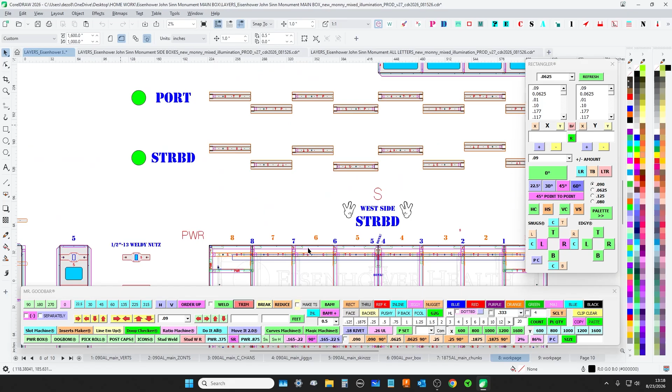John Sinn, Eisenhower. So this was a big boy. I had to break it up into three different CDRs for myself. So when I'm breaking it up into three CDRs, we got ourselves a big job.

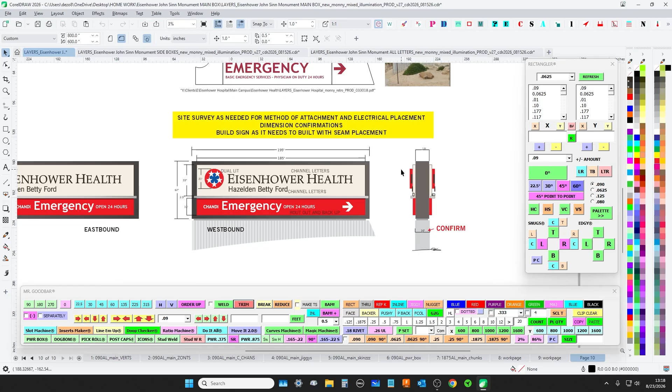I'm not going to go over every little part because you guys have your eye in, because this shares about 80% of the DNA from the Eisenhower Tockwitz 1111, and the Curve Boy right down the street on Country Club, or the Curve Boy on 1111.

This is a little bit of a warning overall, kind of a warno, is that yeah, this guy has literally every kind of thing we do minus push through.

So it has the little silly acrylic letters. It's got regular, reverse, it's got the dual lit with trim cap, plus it has backed up plex and the bar that we always do.

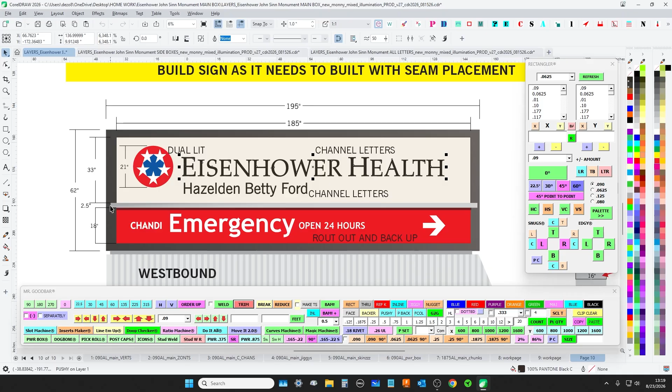So my warning to you, just overall for this, I just want to hit the high notes. Hit the high notes, son. There's a lot of work, but also what's coming behind it.

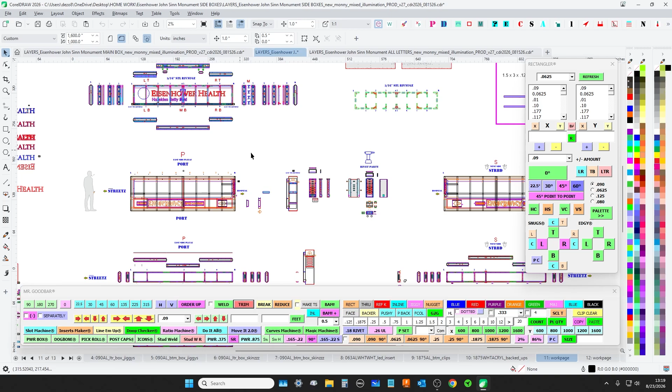You sit in the meetings like me, so we know that everything's going to be the end of September to the 1st of October. And I'm working on the two De Anza monuments, which are also chaos. They're probably the worst little acrylic letters we've done to date, even worse than these little guys, or girls, however they self-identify.

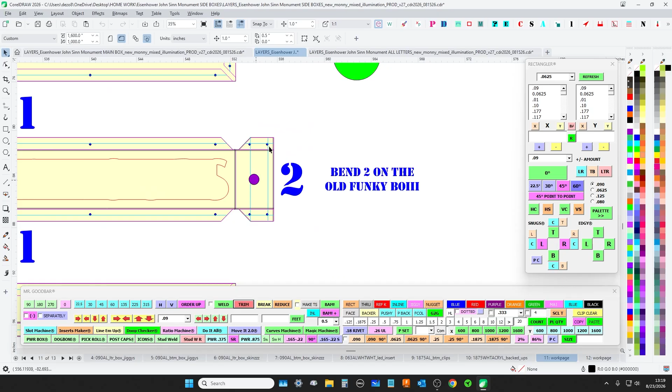My advice to you, and I'm not saying you don't know what's up, but act as if this is due tomorrow. The second you can get these white trays, just for note, you're going to do the main bend and then wake up the little box break and set it up to where you can get in there. And we're going to make the boxes.

You're going to rivet the sides, and then we're going to do the face hugger, like I call it, like we just did with the gas station, because we can't have light leaks. The red box is going to be separate, that way in case it needs to be serviced.

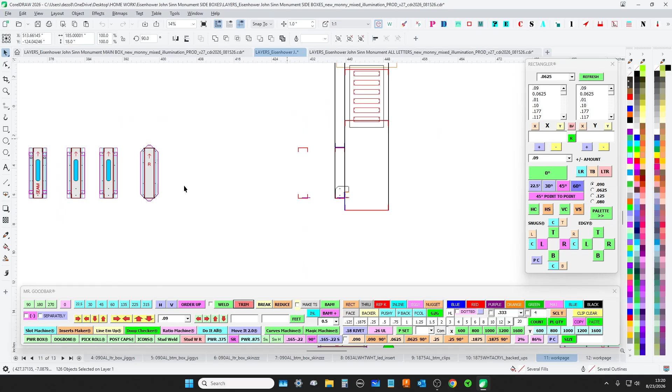Look out for the 1/8 inch right here, just a little bit of space. By the time you drive by, nobody's going to really see it. Plus a little bit of ventilation with an 1/8 inch gap over almost 20 feet should get some airflow.

But anyway, in case we need to take this off, this is serviceable, because I figured once this panel goes on, you're either working from the outside or you're working from the inside at the power panel where all the power supplies are.

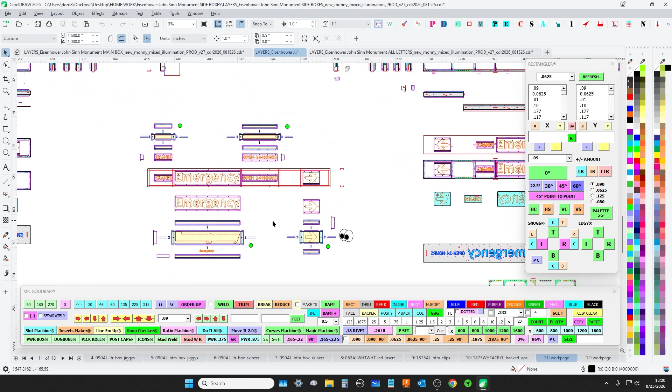Back to what I was saying though, this is going to be a lot of LED work, and this is going to probably come back from paint right in the middle of De Anza. And you got Find Food Bank that I'm sending today. So you're going to have tons of LED work.

So I would first, the second you get these, have somebody dedicated to just LEDing everything, leashing it up. Go ahead and get silicone on everything, act like it's due tomorrow, and then let it sit in the wrap bay and collect dust out there.

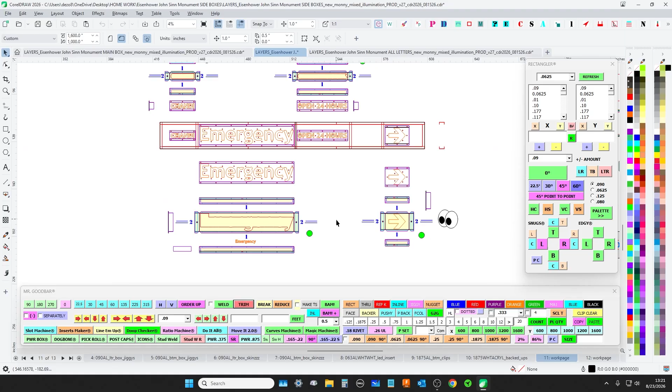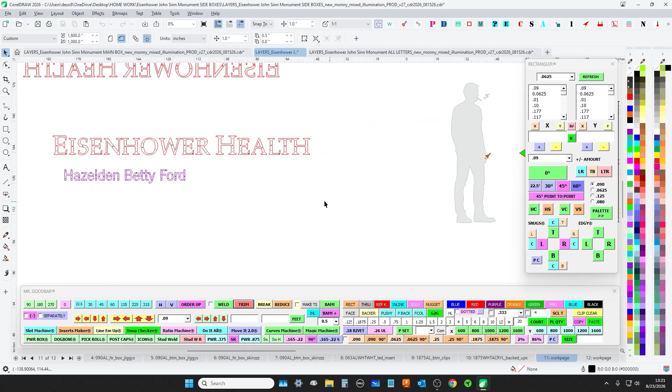Plus these things are big, so you're going to be doing that coffin carry, moving them around, maybe forklift, whatever. So even just the assembly, even forget LEDs, when it comes time to assemble these, it's going to be quite a chore.

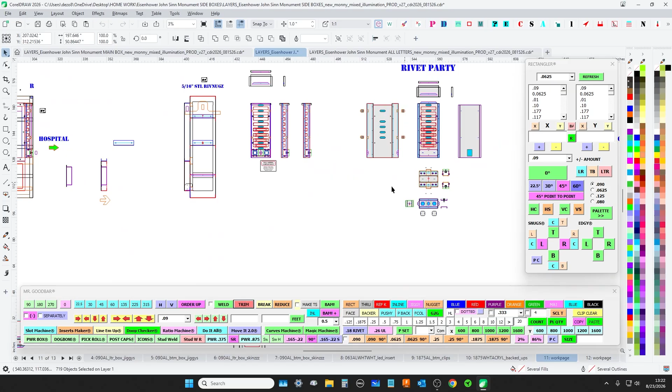So again, this is going to probably drop right back in the middle of De Anza, and they're all going to want it. You know how it is when we have competing salespeople: I want my job, no, I want my job. So just be ready.

Even this thing, I did my best to guesstimate, but I didn't do a full breakdown. So doing the LEDs, the first thing you can get your hands on, the polymerics and whatnot, get the count. Then you can split it up.

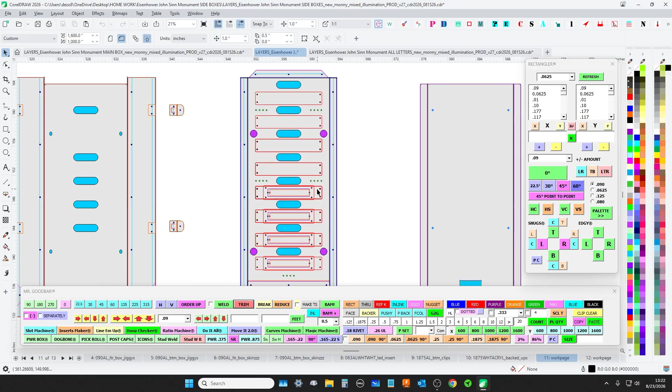What I did is I tried my best to figure these guys would be 24 volt GE. So you'd have like logo on one side, logo letters, maybe the bar, right? And then maybe these two could be the two emergencies, the red cabinets, backed up Plex, possibly. This saves you, I have these set for MPSs right here, but I also have Keystone. So maybe bring in a bunch of Keystones as well, because those are going to be 20 or 12 volt, the little boys.

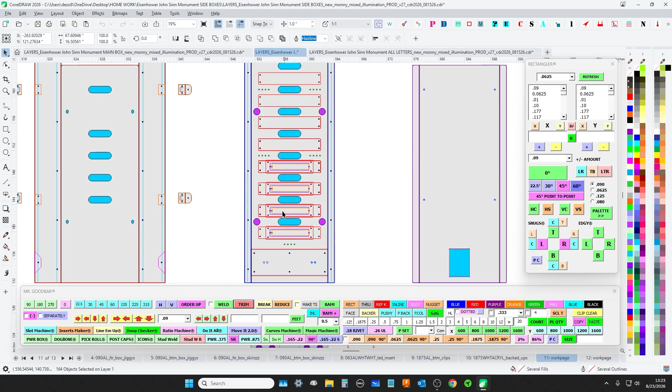So I figure you could maybe do one power supply per side, that might fit everybody here, maybe these two Keystones or two MPSs. However, you might have to scramble on your back foot because the project breaks down, you might just get a bunch of Keystones and keep your spacing, but maybe sprinkle them down on the bottom area if you need more room. This is about all the room I had inside the sign to get this stack going, so be ready to improvise in that area if the LEDs aren't enough.

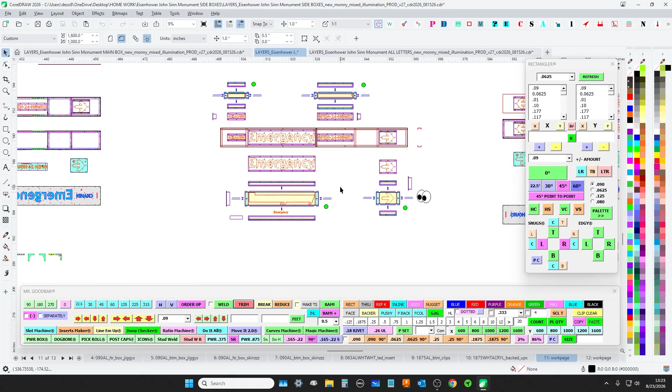Again, a whole reason to just get the LEDs done as soon as you possibly can. Just get them done the day of, and keep somebody dedicated to that as you keep going forward, especially getting all these soldered. There's not going to be room for any riv nut or wire nuts or anything. So even though these are nanos, you're going to act as if you're going to have to solder connections.

You're going to have to silicone them down. Plus, when it comes time to assemble, remember we're doing the silly boy, we're actually going to seal these up, so they need time to cure. This will be right in the middle of the crunch for all of that. Plus, I have the regular channel letters and the boxes for the pylon sign on the freeway, so that's going to be hitting right there as well.

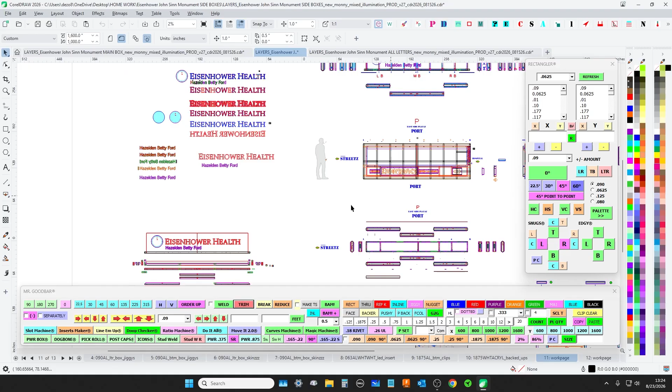So I'm sitting on a bunch of work. I'm crushing it as hard as I can. But I'm just giving you warning that this right here is a ticking time bomb, as far as if you don't handle it as if it's got to be done right away.

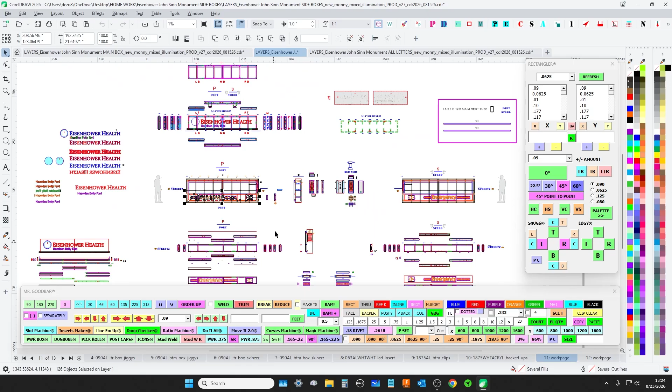And then the assembly, I kind of see it as the bottom box can go on first for install, just put the bottom box on. You've got a couple of riv nuts here, you got the 5/16, and then on the bottom it's got the screws, similar to like I said, it's 1111 all over again. You got those tabs that stick out. That takes care of the bottom box.

And then the top box can come in crane style for them. Once that top box goes on, I think it's good to go. Shouldn't ever have to take that off other than to rewire the sign, but hopefully you don't have to do that.

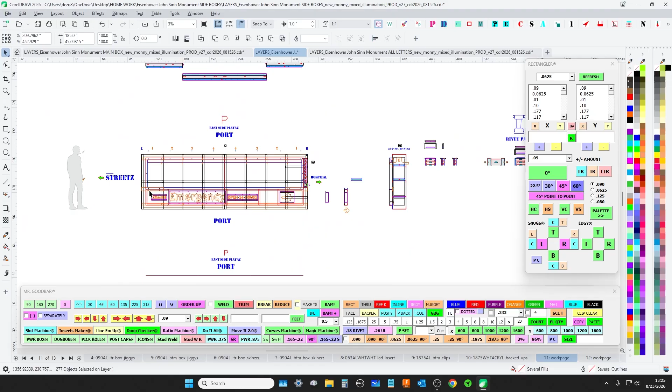That way it makes the bottom box serviceable. Hopefully with that 1/8 inch, you can kind of peel that box off with a couple of homies and try to just deadlift that thing off, if you ever have to replace these guys. So this had to be serviceable. Plus, like I said, I'm going for that face hugger, I call it the face hugger there, so we're going that ACF style. Hopefully that keeps the light leaks down and everything like that.

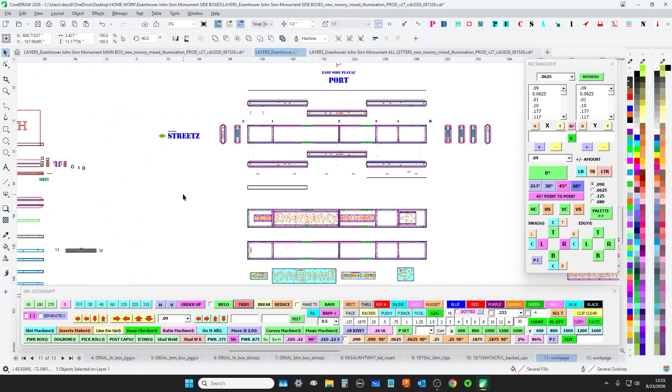So, but yeah, you got the bar, that nonsense with the multiple pieces of polycarbonate. So there's just a lot of work. I would act as if this thing's due tomorrow, because right behind it's going to be coming a lot of stuff. It's all about the due date. Sounds like everybody wants everything right now.

But other than that, yeah, because this right here could be a day, but this could be hidden, a lot of work hidden right here. So just treat this guy like it's due tomorrow, that way you'll have breathing room for what's coming up behind it.

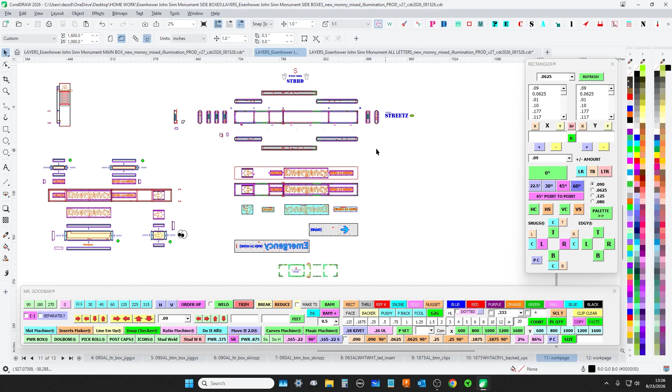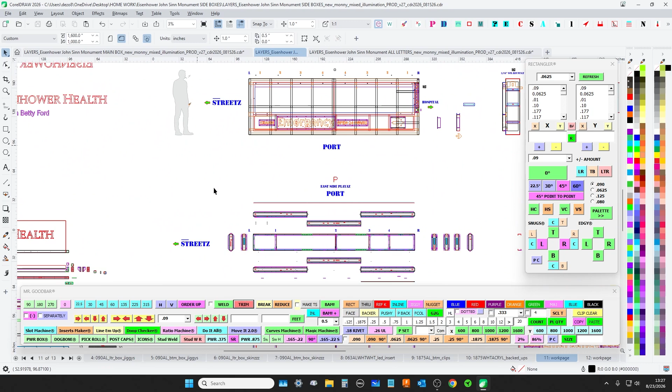So I think that's kind of what we need to do. We'll see, we might have to do some testing on that, but I'm just letting you know, bring in all of it. And bring in plenty of Tetra, because you've got the food bank coming up, all that.

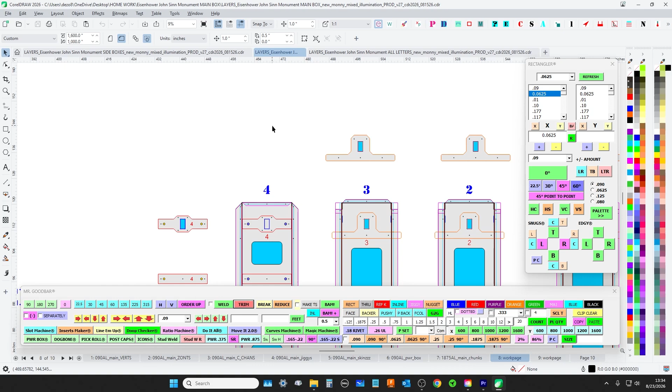So anyway, that was just my suggestions on that. I could go over all the parts, but I think you guys see it. It's Tockwitz 1111. Also what I want to point out is that on the big box here, I put everything on a diet for 3/16. I was trying going from quarter to 3/16. The issue is, though, on paper it makes sense, right? If you're paying dollars per pound, a sheet of 3/16 is lighter than a sheet of quarter, so it should be cheaper, right?

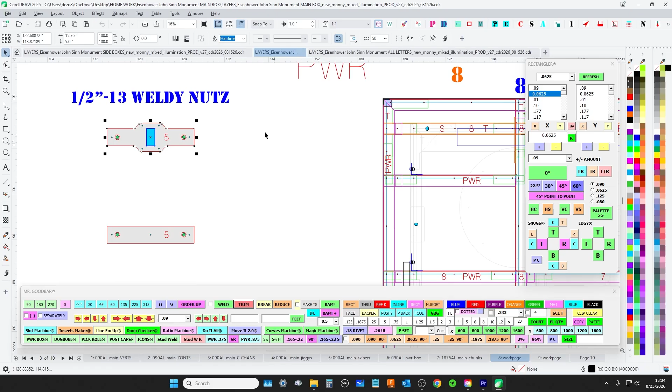But the problem is there's no free lunch, never a free lunch. The 1/4 inch comes in 5x sheets, you can only get 3/16 in 4x, supposedly, that's what Danny says. So it could be a yield issue. Per sheet you're paying less because it's dollars per pound, but if we have to order more sheets of 3/16 to get the same amount of stuff out of it that we do with 1/4, maybe we're not saving the money we think we are.

But from a standpoint of fabrication, it shouldn't be that big a deal. But if you're welding up the half boys like we do here, if there's any issue, too much warping or anything, just let me know.

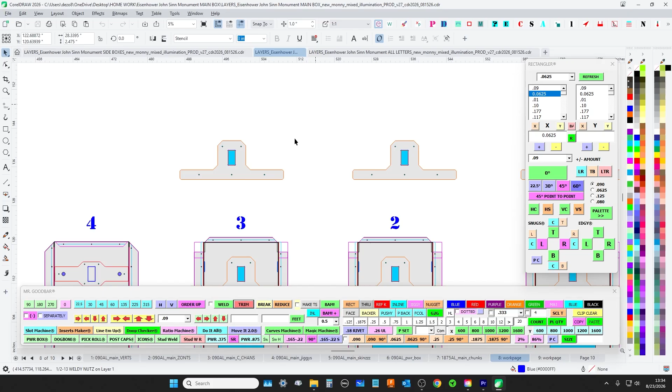Also, I'd like to consider even stepping down from here. I just don't want to get the bends jumping from quarter to eighth, but I think we could also get away with a lot of parts in eighth as well. The mullions and things like that, the structural parts that keep the thing nailed down, probably stick with quarter. But here and there, like these guys could probably be eighth. I'm sure they could, no problem.

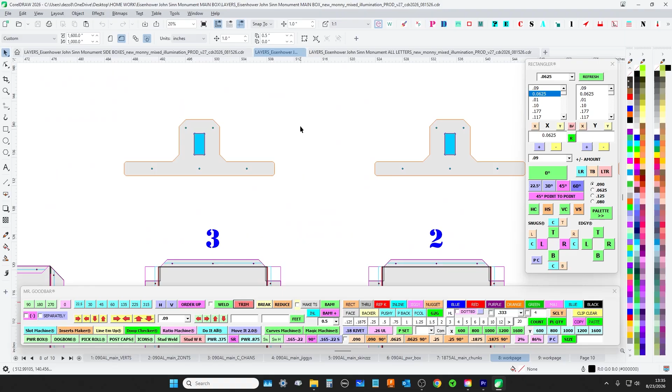My issue with eighth, though, is usually with quarter and 3/16 we're dog-boning that kind of stuff, so the dog bones have to get kind of small with eighth. I try to keep my minimum bit, for those playing along at home, for aluminum at 5/32. That's the smallest. If I have to dip into eighth, then I feel like I'm doing it wrong because it's just too brittle, ready to break, that kind of stuff.

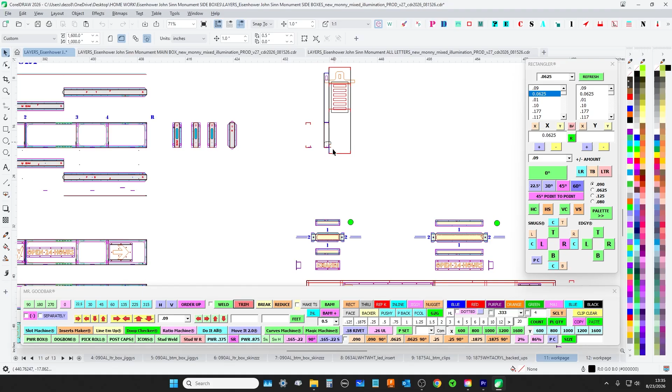So I can hear people yelling and screaming saying, 'Oh, I use eighth all the time,' but these are going to be 3/16 as well. These are the little guys that hold the box up, you know, so keep an eye out for those.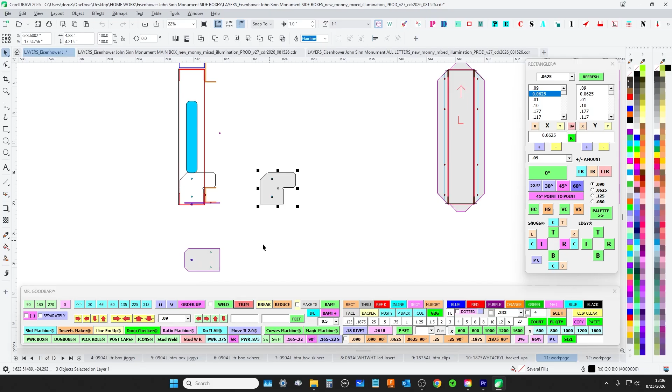Yeah, let me know how 3/16 works. I'm sure it's fine, but if there's any issue... I also told Danny to keep an eye on the cost, and if he does find a yield issue where we're buying more sheets to keep up, then maybe we'll step down to eighth. I'm sure this could have been eighth, this could have been 09, I'm sure, but paranoid first and then trust later. But yeah, so there's that. Keep an eye out for that.

That being said, this is a reason, not an excuse, but there's a good chance when I'm jumping back and forth with all of these parts that I miss something. So keep a sharp eye, be gentle, let me know what I missed without beating on me. So anyway, that's it. Good luck, and hit me up if you have any questions. Check the technique.